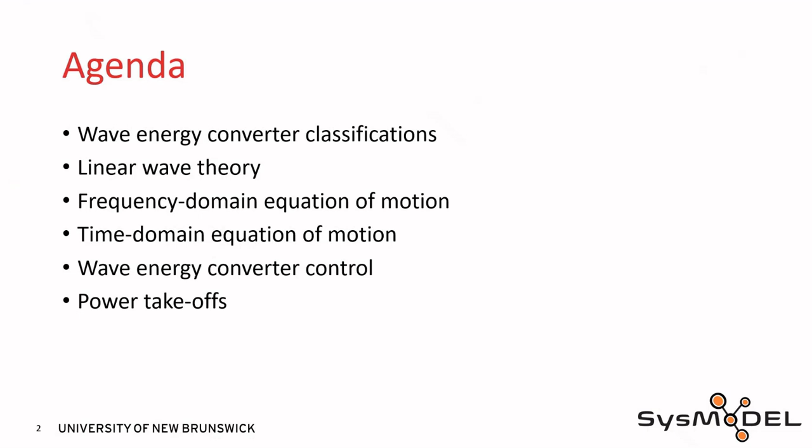Ocean wave energy has the potential to contribute to meeting the demand of increasing electrification. It contains the highest energy density compared to other renewable sources such as wind and solar, while also being much more predictable, making it an appealing alternative. Furthermore, diversifying energy generation by including additional renewable energy sources can help ease the inevitable transition from fossil fuels to more sustainable methods. However, WECs are still in their technological infancy and their levelized cost of energy is not yet competitive with other renewable energy sources.

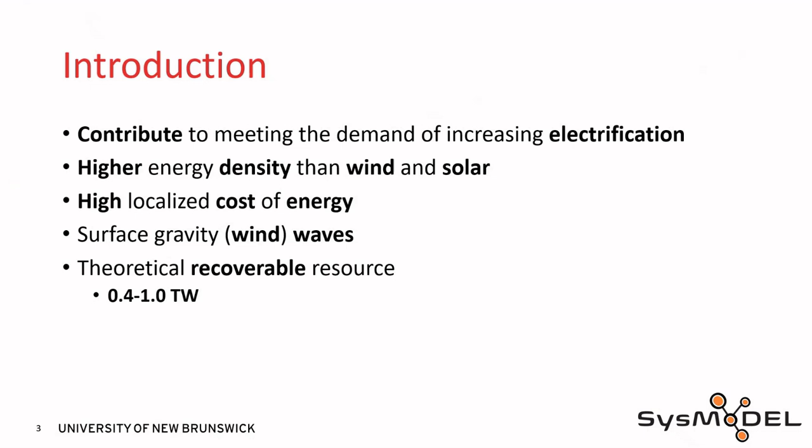Wave energy is extracted from ocean waves, particularly surface gravity wind waves. These waves are generated by wind acting over the ocean surface and have temporal periods ranging from half a second to 30 seconds. The global theoretical resource is estimated to be in the range of 2 to 3 terawatts, of which 0.4 to 1 terawatt is estimated to be recoverable. Comparing this to the global electricity demand as of 2019, which was 2.6 terawatts, should the entire recoverable wave energy resource be captured, upwards of 15 to 40% of the world's current electricity demand could be satisfied. Although fully extracting the exploitable resource is unrealistic, even a fraction of this total could supplement existing generation sources and further decrease reliance on fossil fuels.

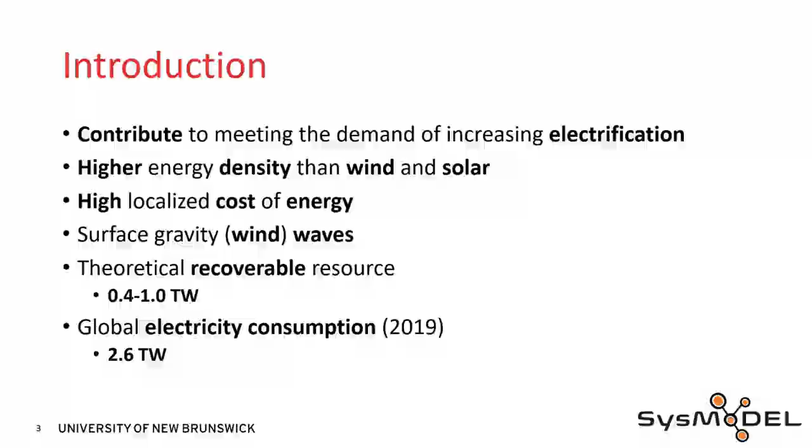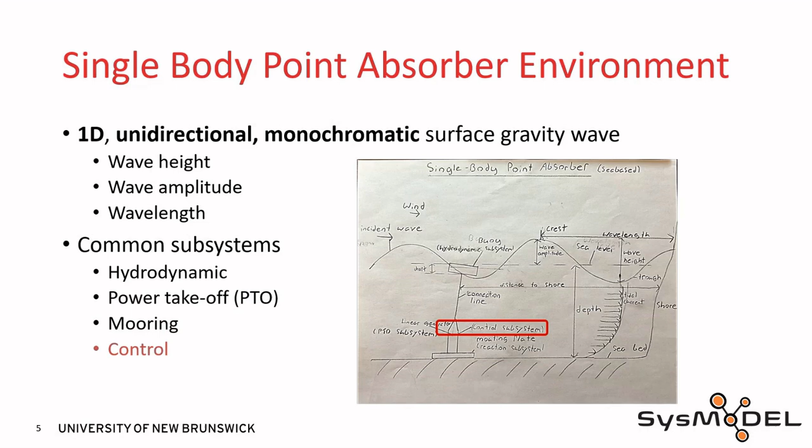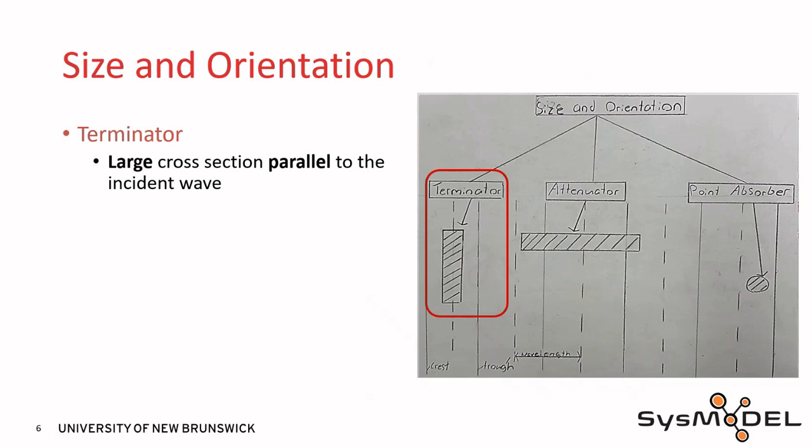Classification according to size and orientation refers to the size and position of the device relative to the incident wave. This system defines three distinct device categories: terminator, attenuator, and point absorber, whose geometries and dimensions can be seen here. Terminators have their largest cross-section parallel to the incident wave. Alternatively, attenuators have the largest cross-section orthogonal to the wave. Meanwhile, point absorbers are small relative to the incident wave.

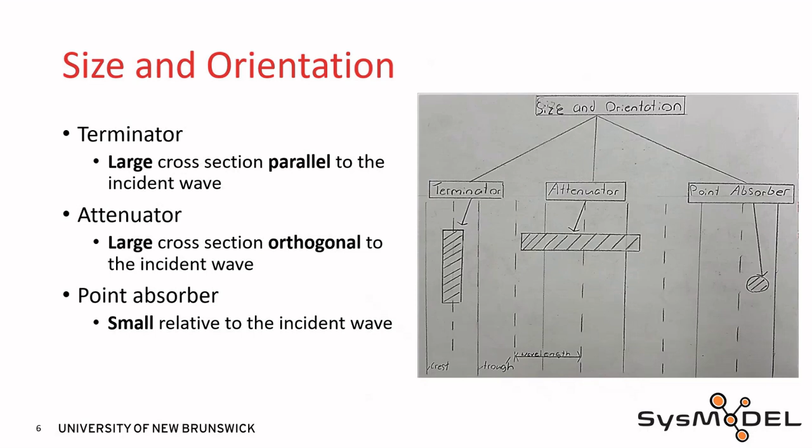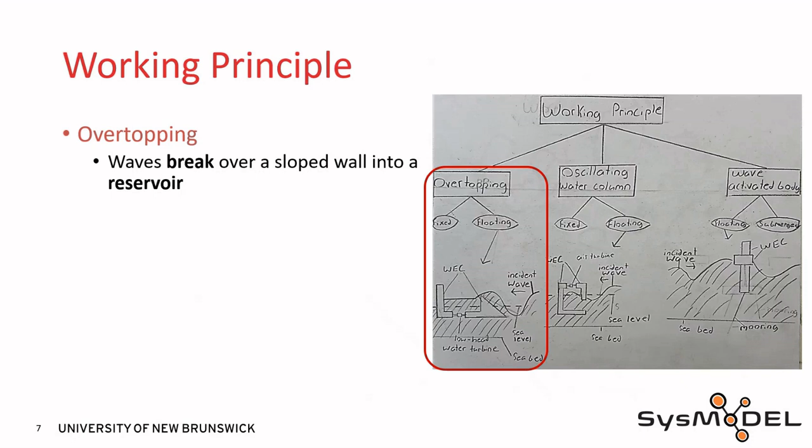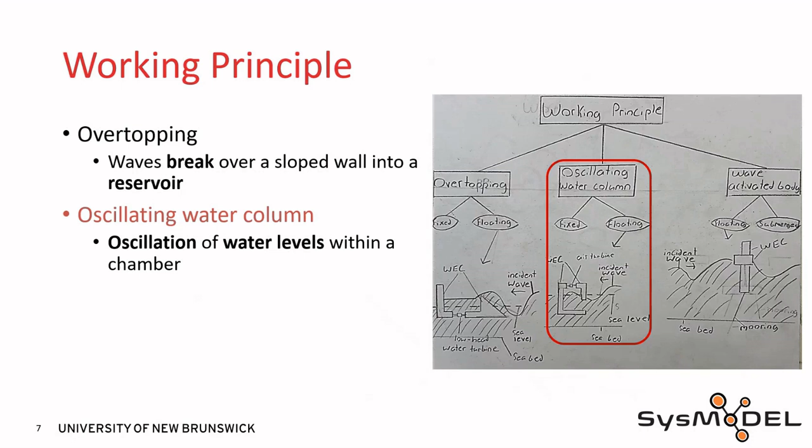Classification according to working principle refers to how the device captures energy. This system defines three distinct device categories: overtopping, oscillating water column, and wave-activated body, whose geometries and dimensions can be seen. An overtopping device captures energy by allowing waves to break over a sloped wall into a reservoir stationed above sea level. The water exits through an outlet at the bottom of the reservoir where a low head water turbine is positioned. An oscillating water column uses the oscillation of water levels within a chamber to capture energy by creating a pressure differential between the air in the chamber and the environment. It uses an air turbine, often a Wells turbine, stationed in the port, which can extract energy from the bidirectional airflow.

The description of wave-activated bodies covers a diverse range of devices. However, the overall working principle is consistent throughout. They use the incident wave to excite a body into oscillatory motion that reacts against a reference point, whether that be another body or a fixed point on the seafloor. The interaction between the wave and the body extracts kinetic energy from the wave and converts it into kinetic energy in the form of oscillatory motion of the body.

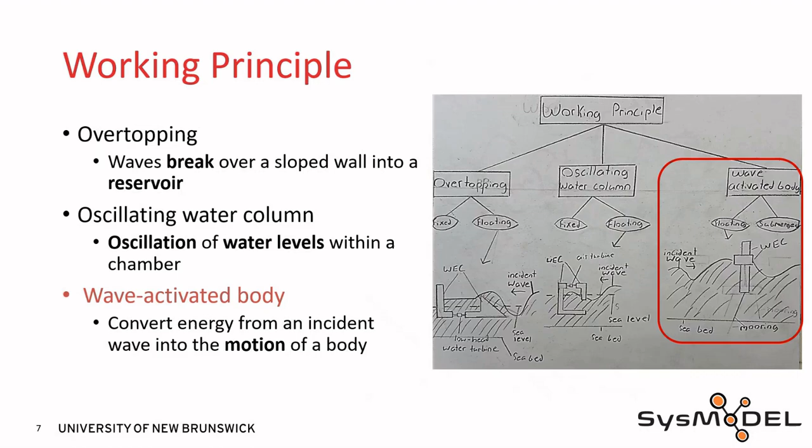Linear wave theory, otherwise known as Airy wave theory, provides a means to describe fluid flow in idealized conditions. Complex waves can be represented as the superposition of independent harmonic waves, with each representing a propagating wave of constant frequency and small and constant amplitude.

Selecting idealized kinematic boundary conditions and enforcing various assumptions, the harmonic wave can be found as an analytical solution to the Laplace equation. First, we will define the velocity vector field u, which is equal to the spatial derivatives of the velocity potential function phi.

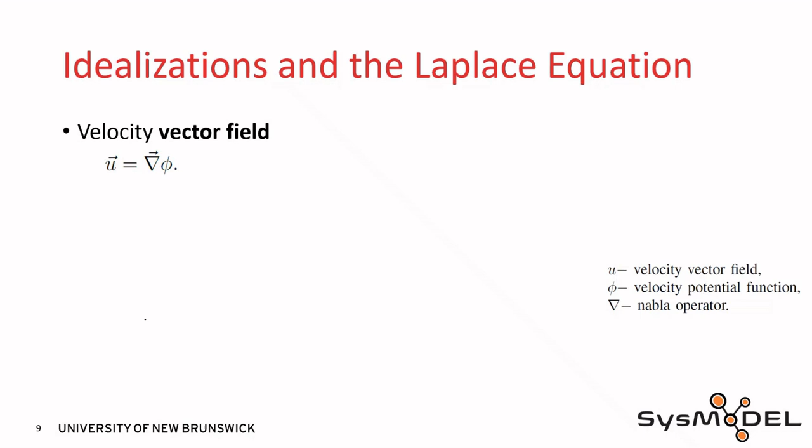Potential flow theory assumes steady state, continuous, ideal fluid flow, meaning it is incompressible, irrotational, and inviscid and has a constant density. The assumption of incompressibility implies that the water particles cannot be compressed, and is imposed mathematically by the divergence of the velocity vector field being zero.

Similarly, irrotational refers to there being no shearing on the water particles that would cause them to rotate about their axis, and is represented by the curl of the velocity vector field being zero.

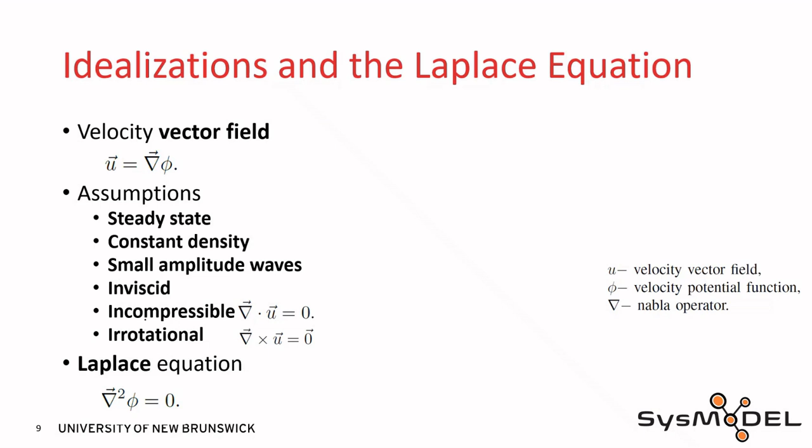The continuity equation arises when the constant density assumption is applied to the mass balance equation, and when it is written in terms of the velocity potential function, the Laplace equation arises. Furthermore, a vector field is conservative if a given potential function satisfies the Laplace equation, meaning the vector field is path independent and must be the case in this formulation.

Idealized boundary conditions must be applied to the Laplace equation to determine a unique solution. Only the kinematic boundary conditions at the free surface and seafloor will be considered.

The kinematic boundary condition evaluated at the undisturbed water level imposes that the velocity of the water particle normal to the surface is equal to the surface velocity, or in layman's terms, the particle remains within the surface.

Now considering the kinematic boundary condition on the seafloor, evaluated at a depth of h, that states the fluid particles are unable to pass through the horizontal seabed.

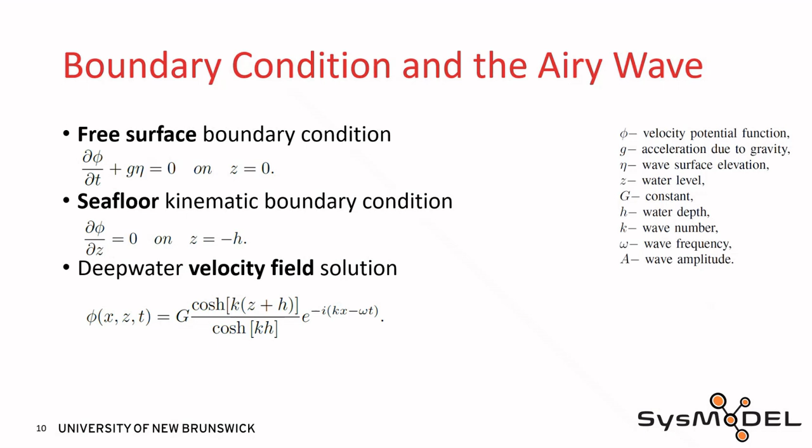The boundary conditions have been defined, and now applying them to the Laplace equation gives rise to the general form of the velocity potential, represented mathematically by an exponential, suggesting that it decreases with depth in the form of a decaying envelope, where G is a constant, k is the wave number, and omega is the wave frequency.

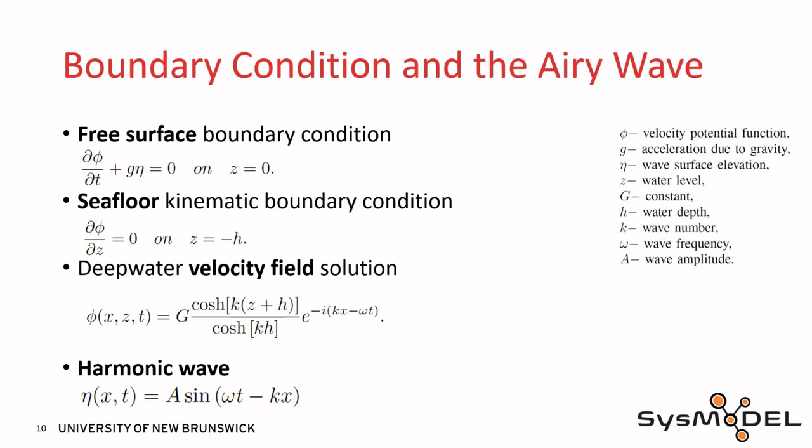The harmonic wave equation results as one of the analytical solutions to the Laplace equation, where a is the wave amplitude.

Frequency domain models are valuable because they provide context behind the hydrodynamic forces, and they're inherently linear, corresponding to a series of algebraic equations rather than differential equations.

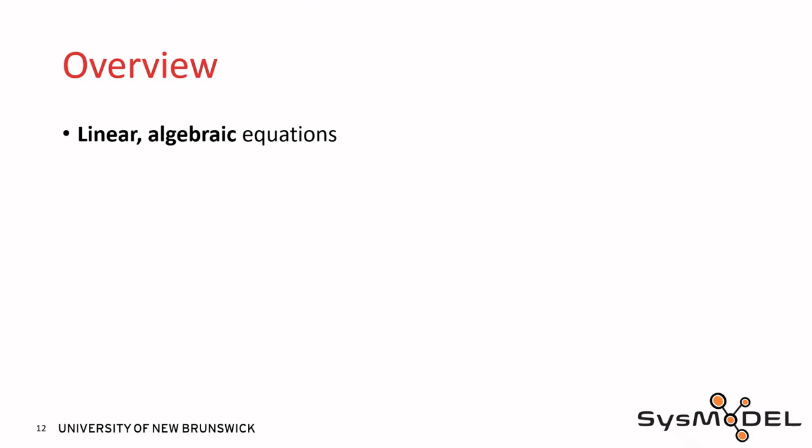However, the linearization process requires implementing oversimplified models, limiting their accuracy. Moreover, frequency domain modeling inherently only models steady-state conditions along with harmonic and small amplitude wave motion.

Furthermore, representations in the frequency domain rely on a simplified lumped parameter mass spring damper model with linear time invariant coefficients to represent the WEC.

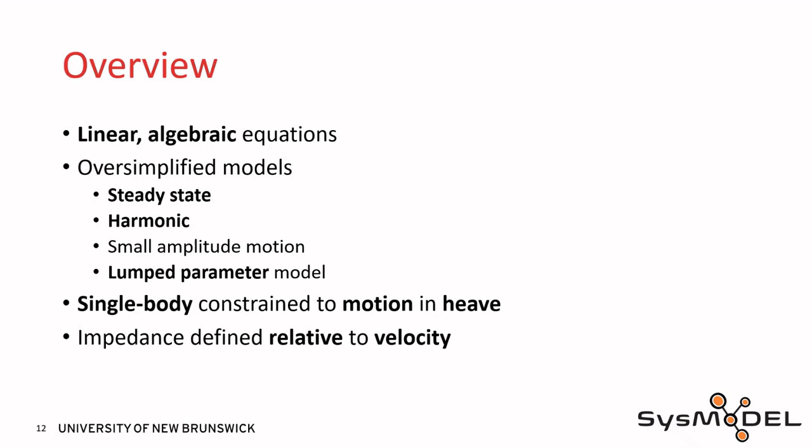Considered in this derivation is a single body constrained to motion in heave, and impedance defined relative to velocity. The forces will be decomposed as we progress through a tree chart, starting with Newton's second law.

The device velocity vector u is the real component of the complex velocity amplitude big U. Writing this velocity vector exclusively as a function of time implicitly assumes it is a linear harmonic function of constant frequency,

and differentiation in the time domain corresponds to multiplication by i omega in the frequency domain, meaning that position and acceleration can be represented similarly.

Newton's second law, including the forces acting on the WEC, as detailed in the time domain, is represented by the mass of the WEC m, the force due to external pressure F sub Pe, and the reaction force F sub Re. This can be obtained in the frequency domain by taking its Fourier transform.

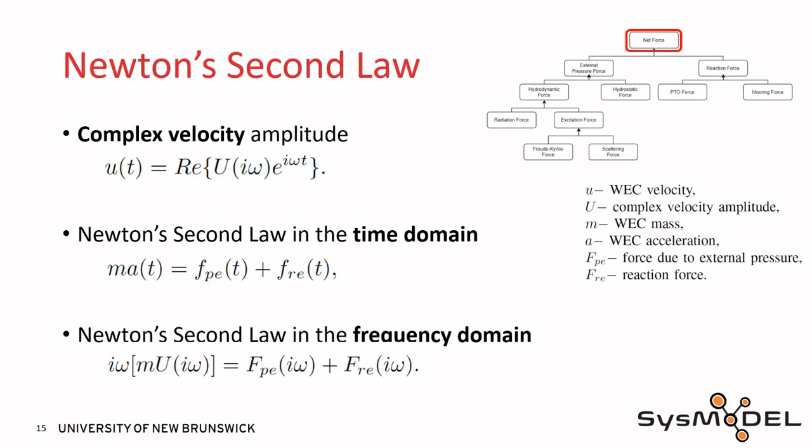The force from external pressure can be represented as the summation of the force from hydrodynamic, F sub Hd, and hydrostatic, F sub HS.

The hydrodynamic refers to the dynamic force acting on the WEC, while the hydrostatic force is the restoring force between gravity and buoyancy. Per Archimedes' principle, when the object is at rest, the buoyancy force and the force of gravity are balanced. Should the object be displaced from its equilibrium position, a restoring force will be applied to bring the device back into equilibrium.

In reality, this is represented by the surface integral of the hydrostatic pressure on the wetted surface of the hull in undisturbed conditions, but can be simplified to a hydrostatic stiffness K sub I. But this assumes a constant water density, small amplitude motions, and a constant cross-sectional area, S.

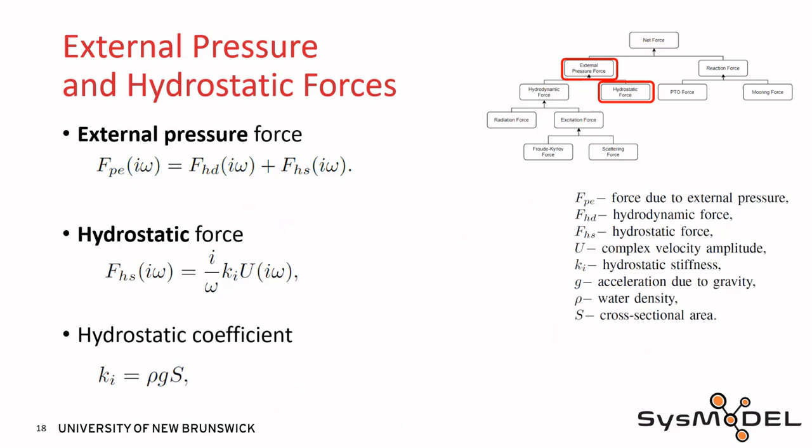The hydrodynamic force is comprised of an excitation force, F sub E, which describes the external force on the system arising from the pressure on the wetted surface of the hull from the incident wave when the body is held fixed, along with a radiation force, F sub R, that details the force generated from the oscillatory motions of the WEC in otherwise calm waters.

This force is represented by the following surface integrals of the diffraction, phi sub D, and radiation, phi, wave fields, and the hydrodynamic pressure, S sub B. To solve these surface integrals, knowledge of the velocity potential defined in linear wave theory is required.

However, the boundary integral problem cannot be determined analytically aside from simple geometries. Alternatively, numerical approaches can be used. These solvers use a boundary element, or BEM, method to calculate the velocity potential on the wetted surface of the hull.

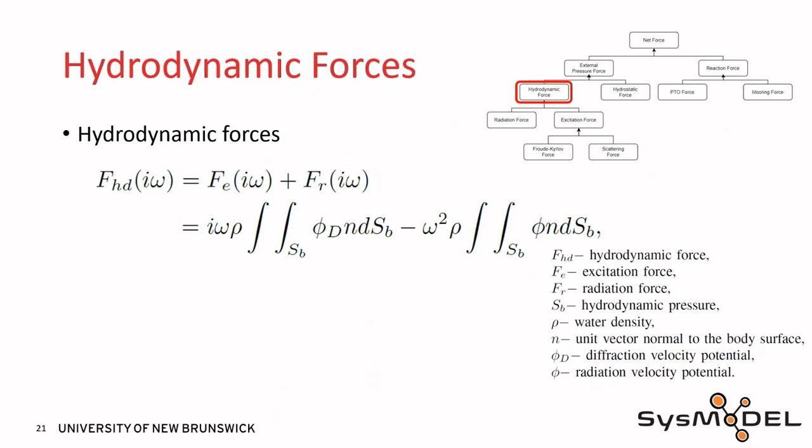The excitation force is the summation of the Froude-Krylov (F sub FK) and scattering (F sub S) forces, expressed as the surface integral of the incident (phi sub O) and scattered (phi sub S) wave fields. The Froude-Krylov force results from the undisturbed incident wave acting on the hull when the WEC is held still, while the scattering force accounts for the disturbed wave when the WEC is held fixed. However, for small bodies relative to the predominant wavelength oscillating in heave, the scattering force is generally insignificant.

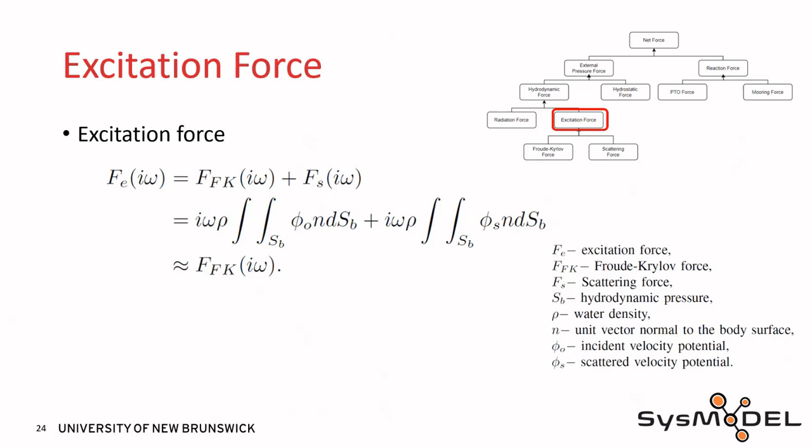The radiation force is a function of the WEC velocity and the radiation impedance, Z sub r. This impedance can be decomposed into a radiation damping coefficient, B sub r, and an added mass coefficient, A. Radiation damping refers to dissipated energy transmitted to the water that propagates outward from the body, while added mass refers to the increase in inertia due to displaced water surrounding the body.

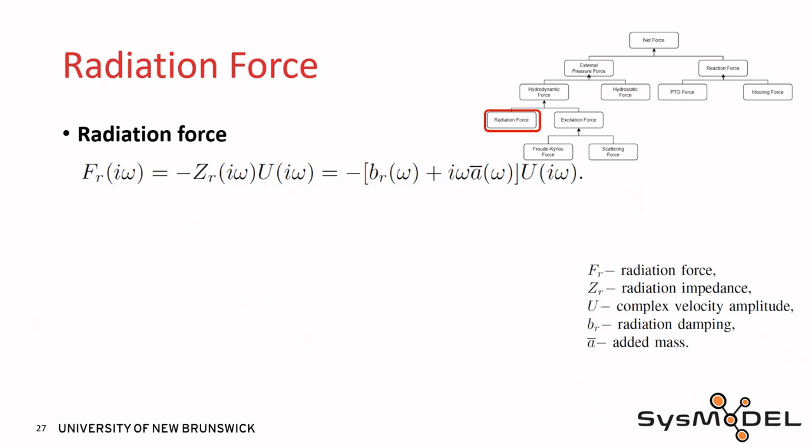The reaction forces include the summation of the PTO (F sub PTO) and mooring (F sub M) forces. The PTO force is the force from the reaction of the PTO components, and the mooring force is associated with station keeping of the WEC. The PTO force can be represented as a spring (K sub PTO) and damper (B sub PTO), but does not account for any PTO mass or end-stop mechanisms.

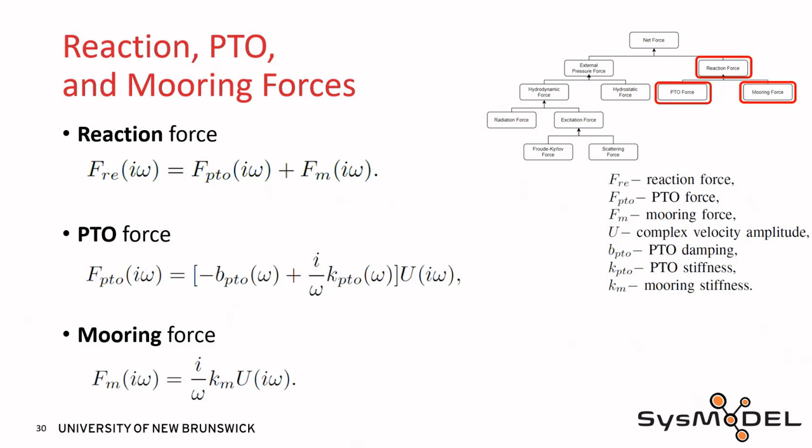The mooring force is proportional to the displacement of the WEC, where K sub M is the mooring spring stiffness. This representation assumes negligible mooring mass, small amplitude motions, and that the natural period of the mooring is considerably greater than the peak period of the incident wave.

The simplified representation of the constituent forces acting on the WEC has been derived. Now they can be compiled and substituted into Newton's second law. Rearranging the result in terms of the complex velocity amplitude produces the following, where the PTO impedance, Z sub PTO, is the impedance of the PTO, and the intrinsic impedance, Z sub I, refers to the impedance of the WEC if the PTO were to be removed.

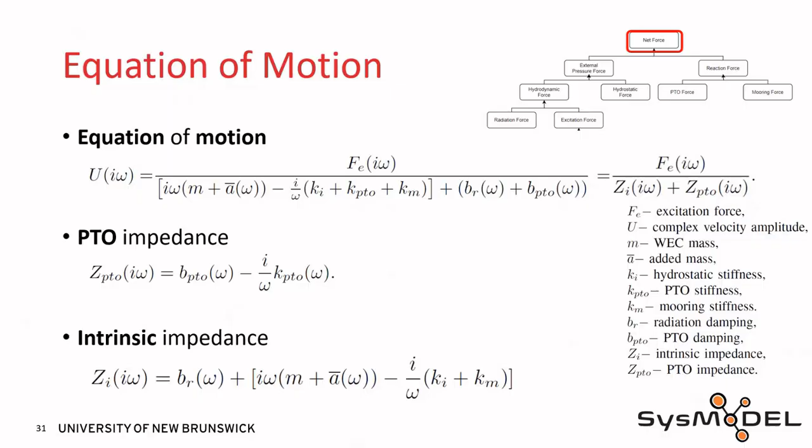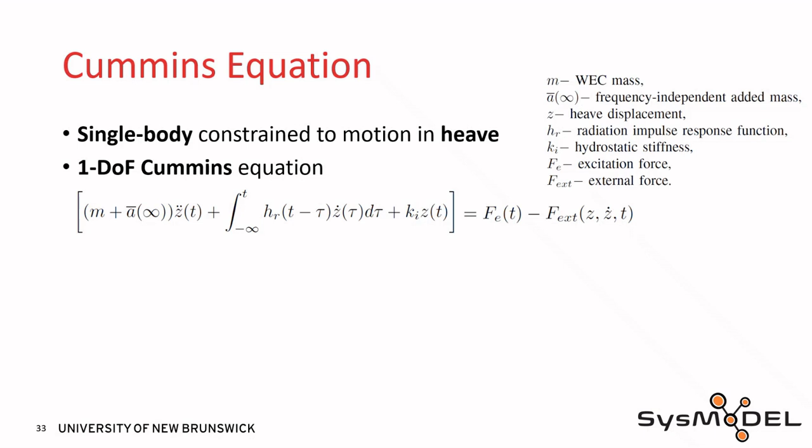Most terms have already been established in the frequency domain, but newly introduced is a convolution integral representation of the radiation force, and an external force term describing external forces acting on the WEC, such as the PTO or mooring. We will now explore the derivation of the excitation, radiation, and Morrison forces in the time domain, and consider the causality of the radiation and excitation forces.

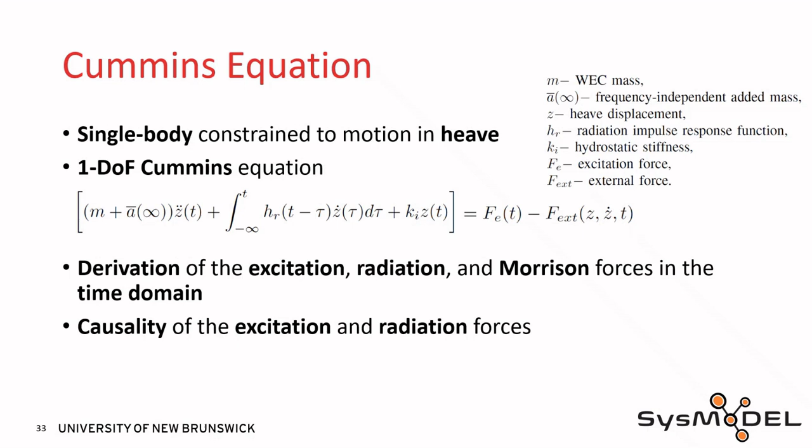The excitation force is defined in the frequency domain by the product of the excitation frequency domain function, h sub f, and the wave surface elevation, eta, evaluated at the device centroid. The time domain equation for the excitation force can be obtained by taking the inverse Fourier transform, and is written as a convolution integral because multiplication in the frequency domain corresponds to convolution in the time domain.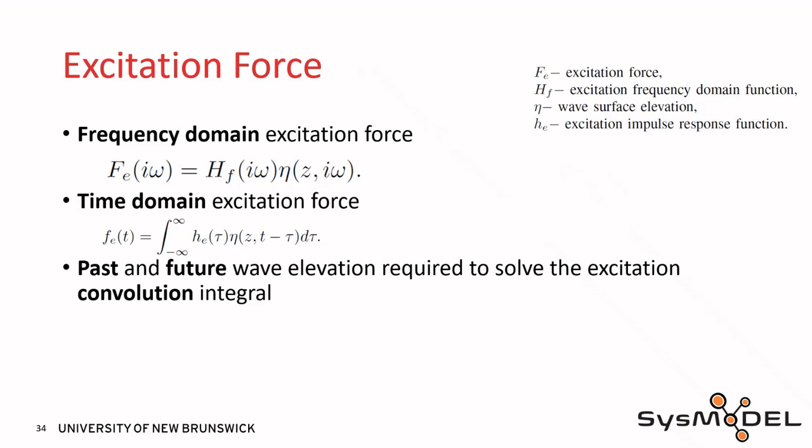The excitation convolution is defined from negative infinity to infinity, and the excitation impulse response function, h sub e, is non-zero for a finite period in the past and future, meaning the bounds of the convolution cannot be reduced to that of a causal system. This suggests that both past and future knowledge of the wave surface elevation are needed to determine the instantaneous excitation force, indicating the system is non-causal. So for the instantaneous excitation force, we need both past and future wave elevation.

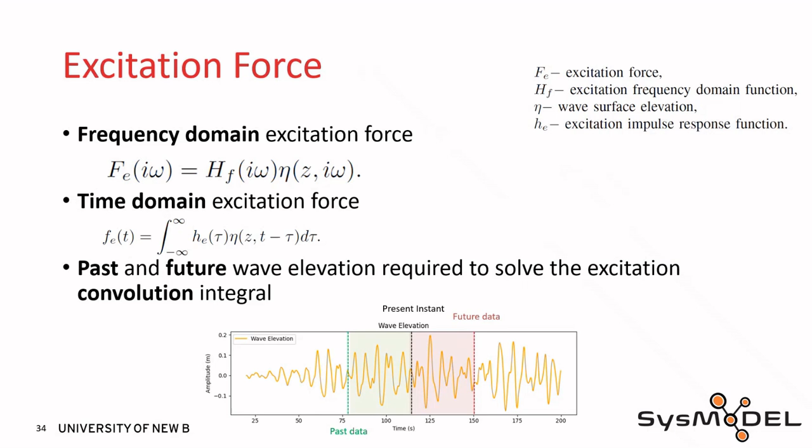Although the bounds of the convolution extend to infinity, in reality only a finite duration of the wave elevation in the past and future must be known, because the impulse response will tend to zero over a finite time horizon. Water under the free surface is a continuum, hence the pressure change due to the incident wave can be felt on the body before it arrives, and lingers after it passes.

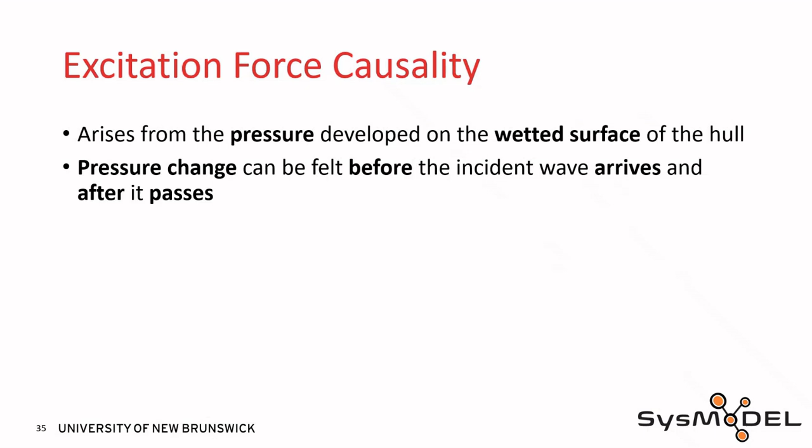The IRF dictates the causality of the excitation force. The system has a response prior to the arrival of the incident wave at the device location and after its passing. Obtaining the requisite wave elevation data must be considered.

Past knowledge of the wave elevation can be easily accessed by measuring and storing the instantaneous wave elevation at the device location. The same cannot be said for future elevation data. Alternative methods must be employed to predict future elevation data, measure upstream waves, or bypass solving the convolution entirely, none of which are trivial.

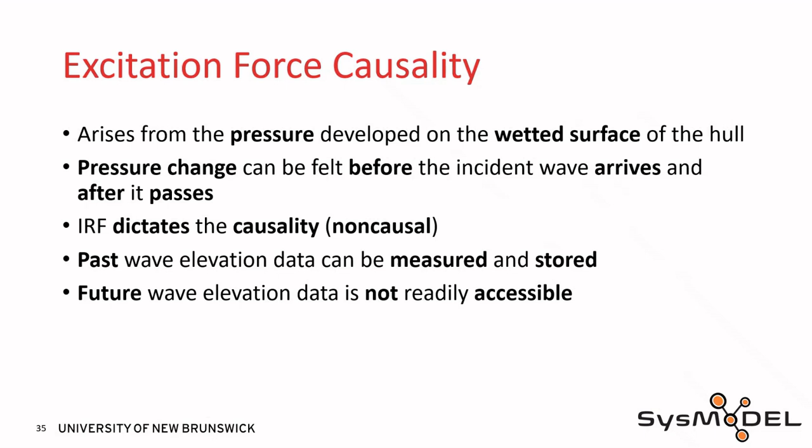Morison's equation is a semi-empirical method to approximate the inline force on a body subject to oscillatory flow. The equation describes the force from the summation of the inertial and drag forces.

Considering a slender cylinder with a small diameter d, with constant water density ρ, and a constant cross-sectional wetted area, it can be seen here.

The inertial F inertia considers the effects of the undisturbed and disturbed flow U over the cylinder. Furthermore, the drag force F sub D arises due to viscous effects and is proportional to the signed square of the flow velocity, and can be shown as follows.

The empirical drag C sub D and inertia C sub M coefficients are selected relative to dimensionless parameters such as the Keulegan-Carpenter, or KC, number, where L is the characteristic length of the body and T is the period of oscillation. The KC number describes the importance of drag forces over inertial forces for oscillating bodies and provides insight into which will dominate in Morison's equation.

Aside from the linear radiation damping, Cummins equation does not inherently account for any energy dissipation.

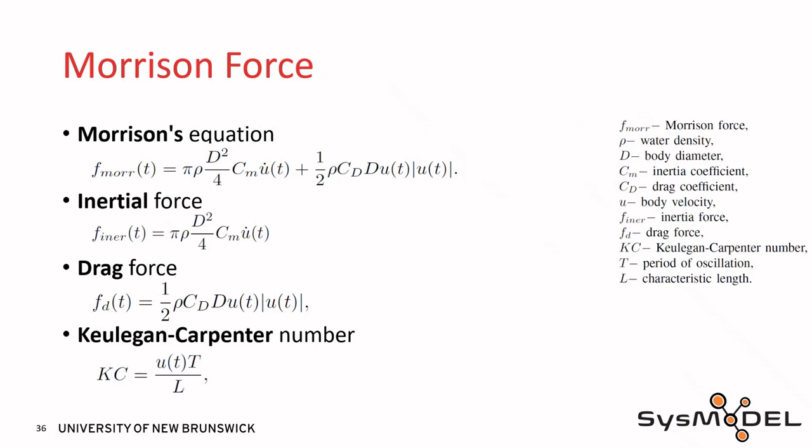So if the KC number indicates that drag is significant, the Morison drag term can be included as a correction factor, especially if the device is operating at or near resonance.

The hydrodynamic coefficients of the radiation force, the added mass, and radiation damping are dependent on the frequency of the incident wave field. At large frequencies, the radiation damping goes to zero, suggesting its inverse Fourier transform can exist. However, at large frequencies, the added mass goes to a non-zero constant, meaning that its inverse Fourier transform does not exist in its current state.

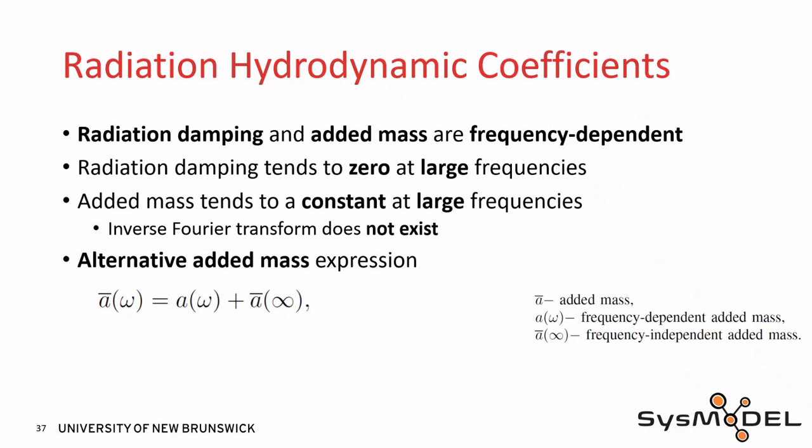Alternatively, the added mass can be decomposed into its frequency-dependent A(omega) and independent A-infinity components, which allow the inverse Fourier transform to exist.

Consider a WEC resting in static equilibrium with no incident wave field. Should the system be excited with an impulsive motion, a wave field surrounding the body would be produced. This wave field would then impart a force onto the WEC, which would then lead to motion of the WEC, suggesting that a past movement of the device affects the current motion of the device.

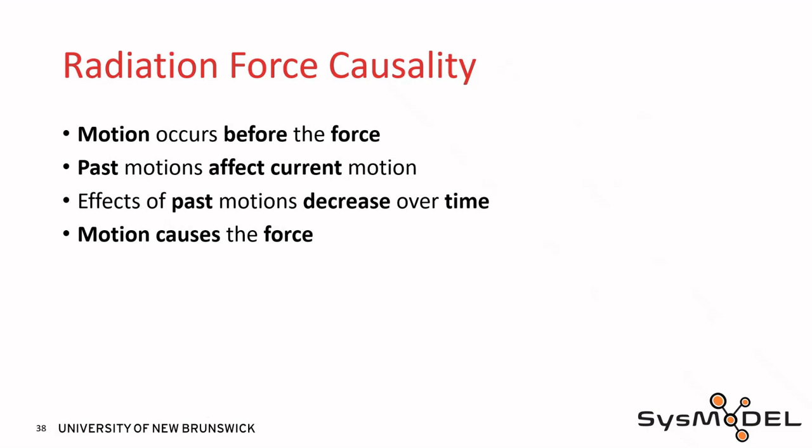As time passes, the generated wave field will propagate away from the body, and its effects on the WEC will decrease until all remnants of the initial perturbation have vanished. Furthermore, as the body was initially in equilibrium in calm waters, no force existed until the body was forced into motion, meaning that motion causes the force.

The radiation force in the frequency domain is the product of the WEC velocity and radiation impedance, which have both been established. Now deriving the radiation frequency domain function h sub r that results from separating the frequency-independent added mass from the radiation impedance.

The time domain radiation force results from the inverse Fourier transform of the frequency domain equivalent, and no response exists until motion occurs, when it becomes a finite real value.

This suggests that the bounds in the convolution can be reclassified to correspond to that of a causal system, and a causal system only requires past and present inputs, meaning that the convolution only needs to span from negative infinity to the current instant. The IRF decays to zero after a finite time horizon, suggesting that the bounds of the convolution can also be adjusted accordingly.

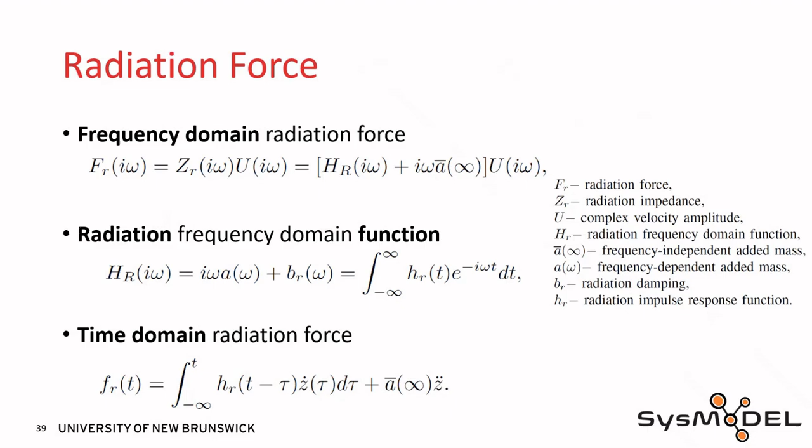Much of the difficulty in solving the Cummins equation arises from the presence of the radiation convolution integral. Therefore, finding alternative solutions has been comprehensively studied. Several methods have been devised to accomplish this, but only the frequency domain approach will be considered.

The general form of the transfer function can be seen in the Laplace domain, where U is the input, Y is the output, M denotes the number of zeros, N poles, and A and B are parameters.

Parameters A and B are determined by minimizing a loss function, which results in the minimum error between the radiation transfer function and the radiation frequency domain function.

As the order of the radiation transfer function increases, so does the number of state variables in a state space form. Although higher order transfer functions may be required to fit the impulse responses arising from complex hull geometries, it will significantly impact the realizability of solving the system in real time.

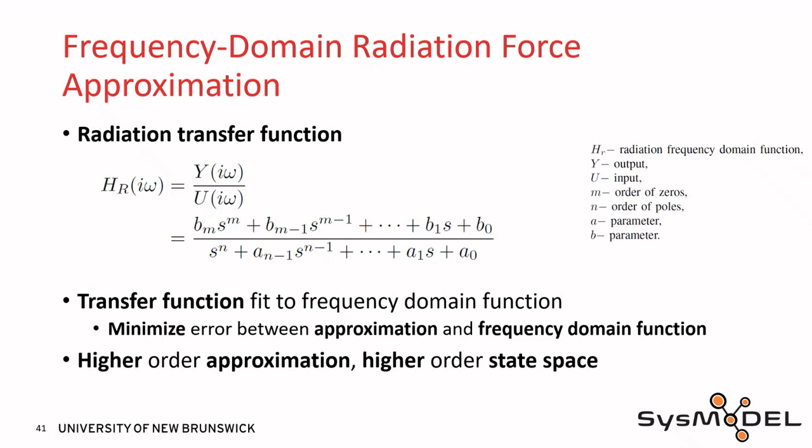A frequency-independent model using constant hydrodynamic coefficients is a second order ODE in the time domain with linear time-invariant coefficients, that correspond to two first-order equations in state space. The state variables are the WEC position and velocity, and the inputs are the excitation and PTO forces.

Accurate applications are limited to monochromatic wave conditions, as the assumption of constant hydrodynamic coefficients neglects their inherent frequency dependence.

The frequency-dependent state space is similar, but instead of assuming the hydrodynamic coefficients as constants, it uses the radiation approximation to represent the frequency domain function. This can be condensed to a state vector Z, radiation state matrix A sub r, radiation input matrix B sub r, and can be accompanied by the radiation output equation Y sub r, the radiation output matrix C sub r, and the radiation feed forward matrix D sub r.

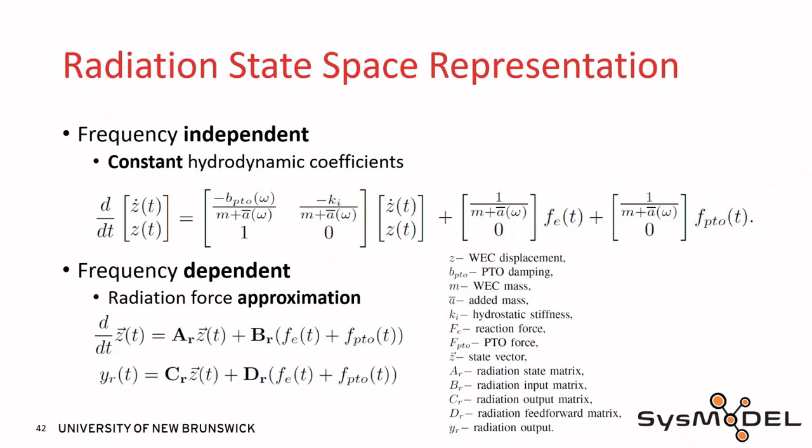Similarly, the inputs are the excitation and PTO forces, but the state variables include the WEC position and velocity, along with several dummy variables whose quantity is proportional to the order of the transfer function approximation. This is more involved, but allows for an accurate representation of WEC dynamics in polychromatic conditions by acknowledging the frequency dependence of the hydrodynamic coefficients.

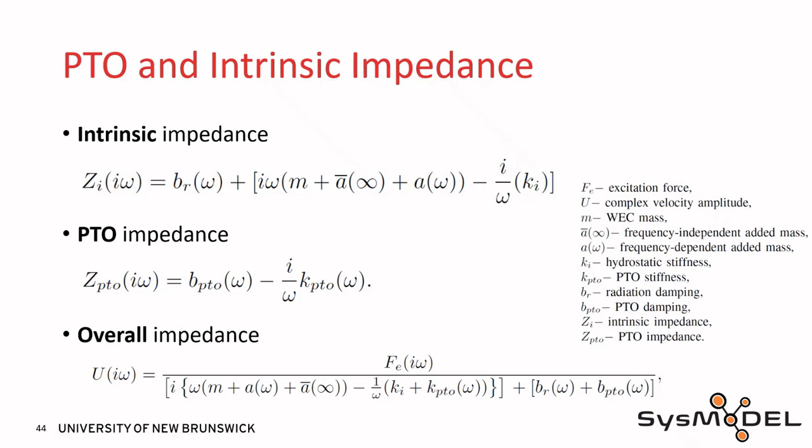We will just briefly reintroduce the intrinsic, PTO, and overall impedances before moving into complex conjugate control. However, since it was initially derived, the frequency-dependent and independent added masses are differentiated and the mooring spring stiffness removed. The largest velocity amplitude occurs for the overall impedance when the numerator is maximized and the denominator is minimized.

Theoretically, the excitation force can be dynamically controlled by changing the hull geometry. However, only the PTO dynamics will be considered here. The minimizing condition for the denominator occurs when the reactive components are eliminated.

This condition can be satisfied by selecting the PTO reactance to negate the intrinsic reactance. Implementing this criterion forces the WEC into phase with the excitation force, imposing a resonant state, and this is the phase condition. The optimal conditions for power capture arise when power absorption is maximized.

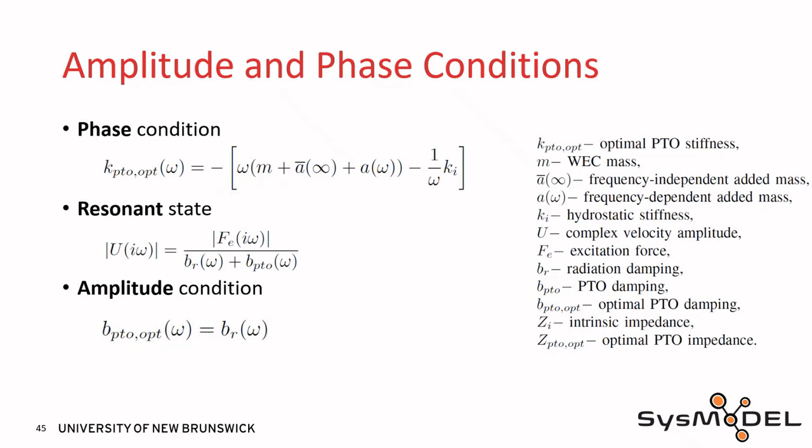The optimal conditions are obtained when the intrinsic and PTO damping are matched, otherwise known as the amplitude condition. In summary, selecting the PTO reactance to eliminate the intrinsic reactance of the system and the resistance to match the intrinsic resistance enforces the optimum power absorption conditions.

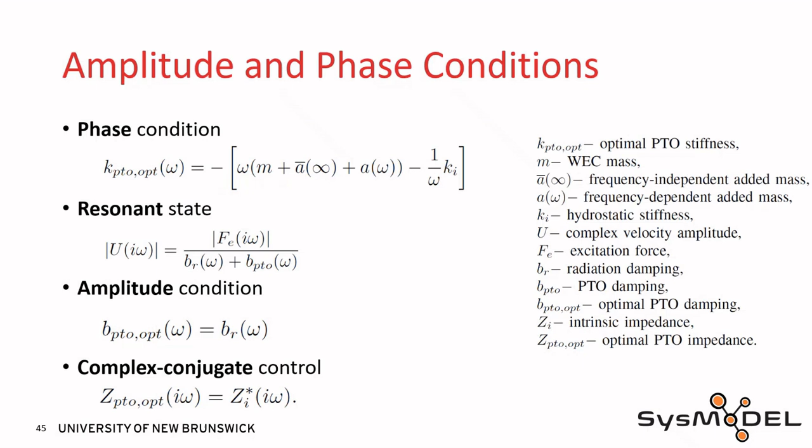Complex conjugate control is a combination of the phase and amplitude conditions where the optimal PTO impedance is set to the complex conjugate of the intrinsic impedance. However, this analysis is only valid because of our harmonic excitation at a constant frequency, which allowed the treatment of the hydrodynamic coefficients as constants.

The derivation of complex conjugate control has established the energy maximizing conditions in the frequency domain. However, real-time control with non-constant hydrodynamic coefficients requires the time domain equivalent, the inverse impedance formulation. The problem can be decomposed into three classifications regarding the causality and optimality of the system being described: causal optimal, causal suboptimal, and acausal optimal, but only the acausal will be discussed.

Selecting the optimal PTO force in the frequency domain to cancel out the radiation frequency domain function. The PTO's radiation frequency domain function must be its complex conjugate. Since the radiation IRF is real, the complex conjugate of the radiation frequency domain function corresponds to a mirroring about t equals 0 in the time domain, and this results in a time-inverted radiation IRF.

The conventional radiation IRF is affected by previous motions, meaning it has a memory effect that requires knowledge of past velocities. However, a time-inverted radiation IRF suggests that future velocities are required to determine the instantaneous optimal PTO force. Physically, this can be interpreted by the PTO requiring knowledge of future waves so that the corresponding radiation force can be produced to cancel out those waves.

Three energy maximizing control strategies developed using these concepts will be examined: the Aalborg PID controller, model predictive control, and velocity tracking control.

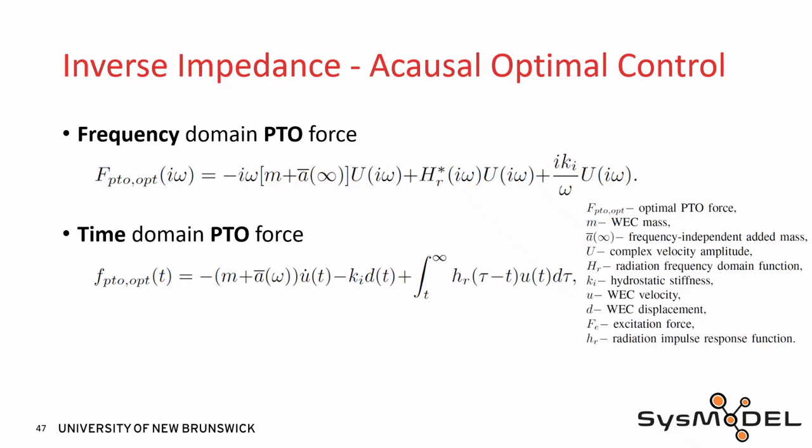The mass spring damper representation of the PTO force takes their familiar form, a proportional integral derivative or PID controller, where M_PTO is the derivative gain, B_PTO is the proportional gain, and K_PTO is the integral gain. The Aalborg PID controller circumvents the non-causality of the acausal optimal control force.

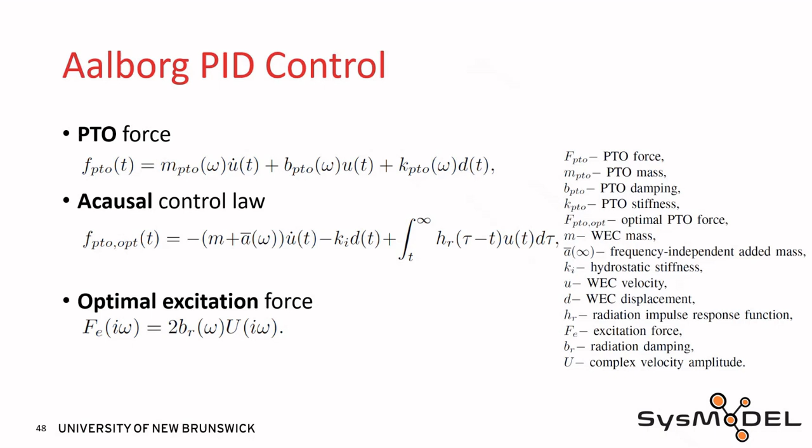The controller determines the desired velocity trajectory to enforce the velocity response of the WEC to be in phase with the excitation force. Assuming the WEC can be continuously held in phase, the energy maximizing conditions in terms of the instantaneous velocity and radiation damping can be used to represent the excitation force, eliminating the inherent non-causality of its convolution integral. After further manipulation, we introduce the optimal excitation force and a causal radiation force to the acausal control law, and the causal control law is produced.

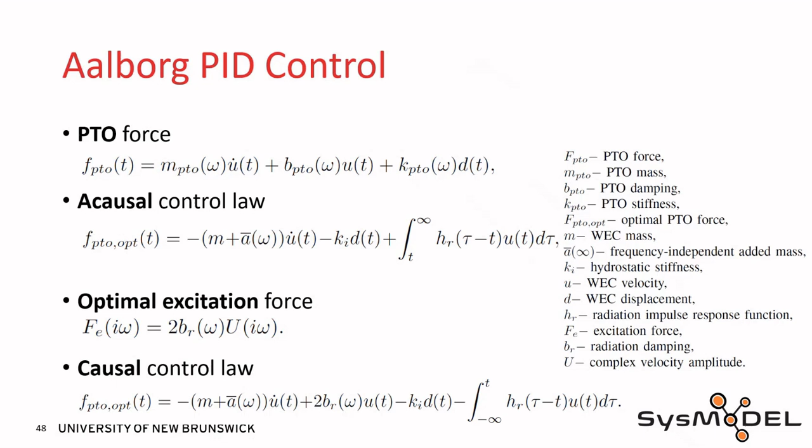Model predictive control is a class of controllers based on numerical optimization applied for real-time optimal control. It uses a dynamic model of the system to generate state predictions over a receding horizon to determine the optimal trajectory while adhering to predefined constraints.

Unlike the more traditional MPC objective function that determines the optimal trajectory to minimize control effort and state error, the objective function for wave energy elects to maximize energy capture. Constraints can be used to enforce the physical limitations of the WEC, often related to the PTO force, WEC oscillation amplitude, and WEC velocity, as well as imposing the system dynamics.

The system model often used with WEC MPC is the discretized Cummins equation with a radiation state space approximation. The state model includes previous states, position and velocity, the control action of the PTO force, and the disturbance, the excitation force. Previous states can be measured and the PTO force is being controlled, which presents no problem when computing states in the receding horizon, but the excitation force cannot be measured directly and is not explicitly known at future steps, nor can it be easily calculated.

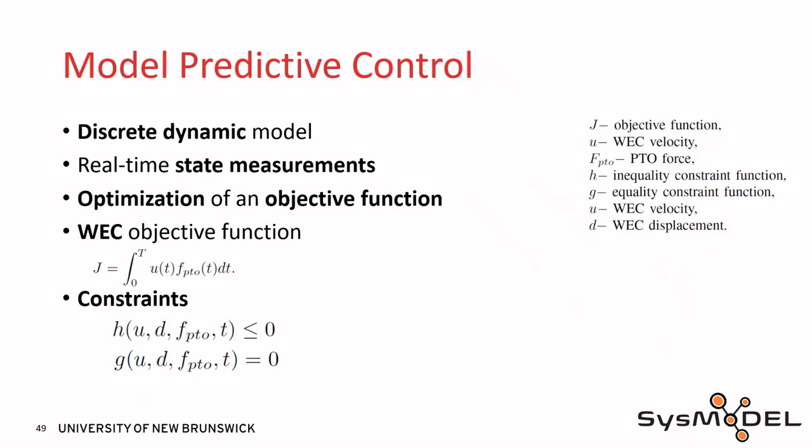Therefore, methods to either predict or determine an alternative means to calculate the excitation force must be determined. This, along with significant computational requirements, poses challenges for implementation in real time.

The velocity tracking controller determines the optimal velocity by assuming knowledge of the instantaneous excitation force and energy maximizing conditions. Assuming the excitation force is harmonic and narrow-banded, it can be represented by a harmonic oscillator. Defining the excitation force as a function of a single amplitude A sub e and frequency omega provides a means to determine those parameters given a known excitation force.

Constant values of the hydrodynamic parameters are selected to model the system, and if the WEC is held in phase with the excitation force, the system model and optimal conditions can be used, leaving it as only a function of the excitation force and radiation damping. The radiation damping curve is fixed for a given geometry. This suggests that the optimal velocity trajectory, v sub ref, can be determined given only knowledge of the instantaneous excitation force frequency and amplitude and the radiation damping curve.

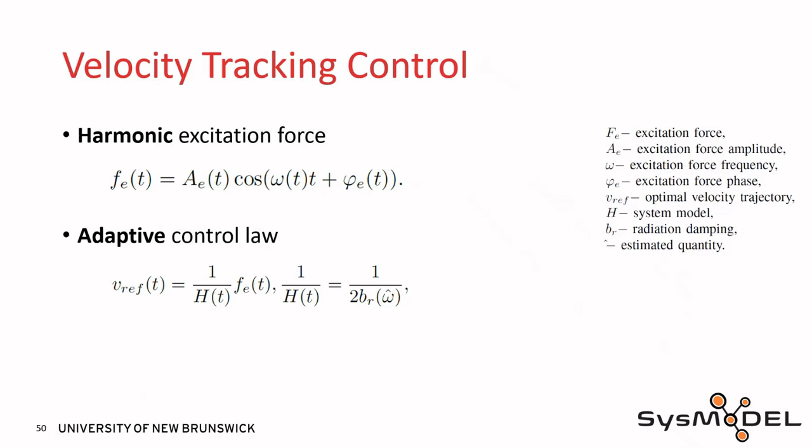The reference velocity and feedback from the velocity state prediction are fed to the low-level controller to generate the control force needed to achieve the optimum velocity. The control and excitation forces are passed as inputs to the state model, which computes the predicted state velocity. However, the crux of this implementation lies in the assumed implicit knowledge of the excitation force, which is one of the greatest challenges for wave energy.

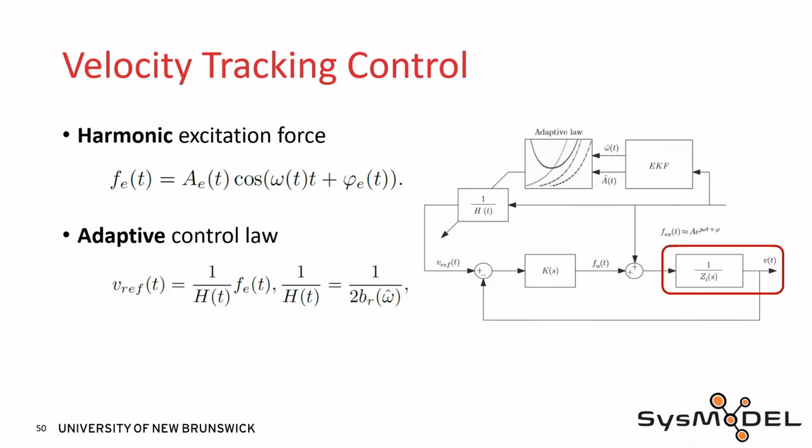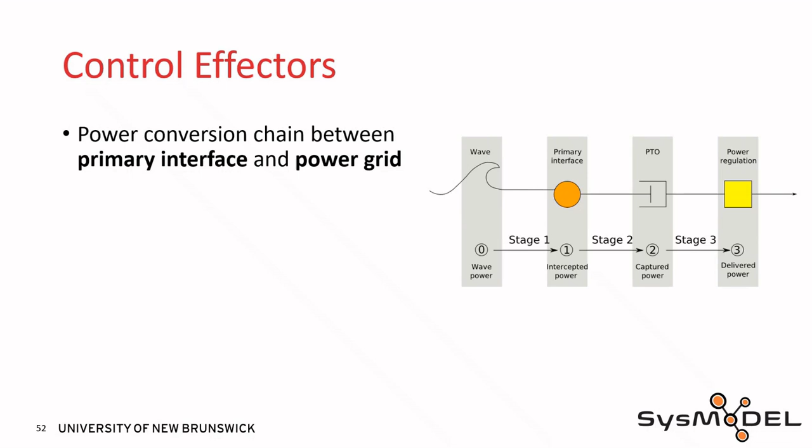The power conversion process only considers the power absorption of the incident wave and the PTO reaction force, ignoring the intermediate steps in the PTO mechanism and the power regulation process. The primary interface, or absorption process, for a point absorber involves transferring the energy from the incident wave into mechanical energy in the form of oscillatory motion of the body.

The second interface involves capturing the power retained by the WEC and is obtained by the PTO providing a reaction force opposing the oscillatory motion of the body. This figure shows the direct drive power conversion chain, where the second interface is a linear generator that captures the mechanical energy from the primary interface and converts it into electrical energy. The third interface involves conditioning the electrical output of the generator, rectifying it, and then reverting it back to AC at the correct frequency before connecting to the power grid.

Among these interfaces, several variables can be controlled to regulate the PTO reaction force. However, if a model-based controller is used, the existing hydrodynamic models must be extended to include all the systems up to that controlled input, adding complexity to the model and increasing the computational requirements of the controller. Now that we know where the PTO lies in the power conversion process, the working principles of a direct drive linear generator will be explored.

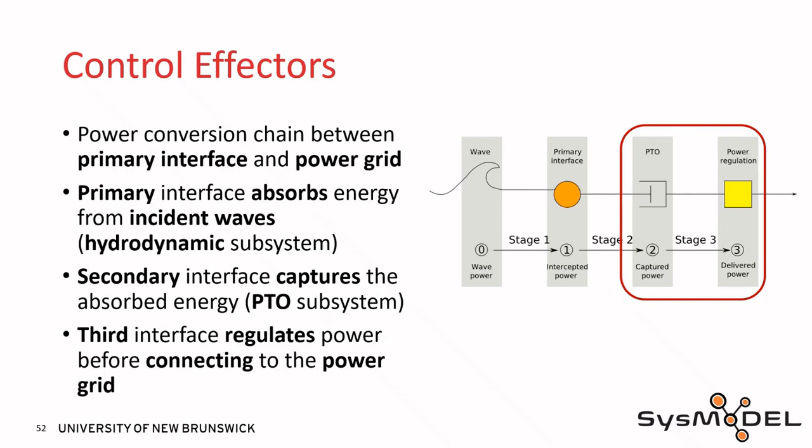Direct drive linear generators are well suited for the inherent reciprocal motion of ocean waves. Direct drive generators directly couple the moving parts of the generator and the power absorbing structure, reducing the mechanical complexity of the system by removing intermediate power conversion steps. Although linear generators boast significant theoretical potential, physical challenges have plagued their unconventional design and have limited their applicability to the test bench. The fundamental theory behind linear generators will now be explored.

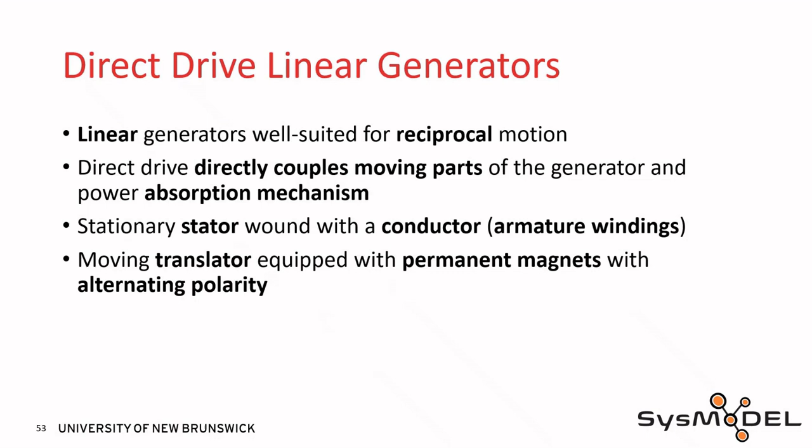A linear generator contains two general components: a stationary body, the stator, and a translational body, the translator. The stator is fitted with a conductor, the armature windings, and the translator is equipped with permanent magnets mounted in alternating polarity. The changing magnetic flux from the translational motion of the permanent magnets on the translator about the stator coils induces an electromotive force, or EMF.

Should this induced voltage be connected to a load, it will prompt current to flow. This current then generates a magnetic field that opposes a change in flux by creating a back EMF that acts on the translator.